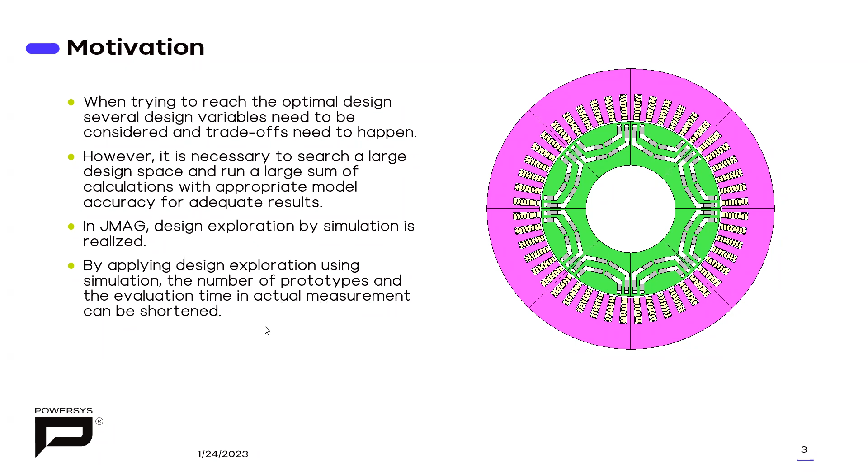So about the optimization issue, briefly, of course, now the large number of design parameters. So here you can see a sample example. This is just the rotor, but you've got also some for the stator. So more than 25 variables here. So you will have also wide ranges for all those parameters, but maybe those wide ranges will make the shape collapse like that with some overlapping regions. And we also still have many outputs like torque, loss, stress, and different operating points to be considered.

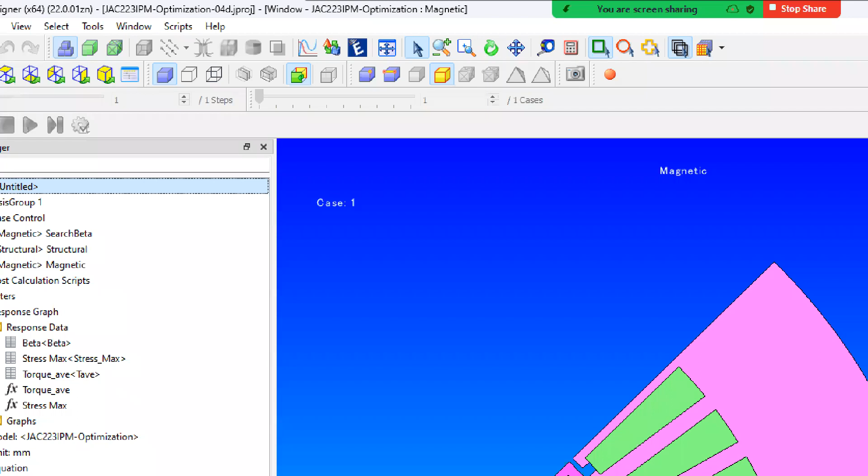So optimization is not new in JMAG. We had, for example, this very classical optimization. This is a model which could be downloaded in the JMAG application catalog. You've got the number here. Okay, all those features were already embedded. The thing is that in that case here, if you check in the optimization, you've got 1, 2, 3, 4, 5, 6 design variables. So the amount is relatively small, and you can see that the design of the rotor is not so complex.

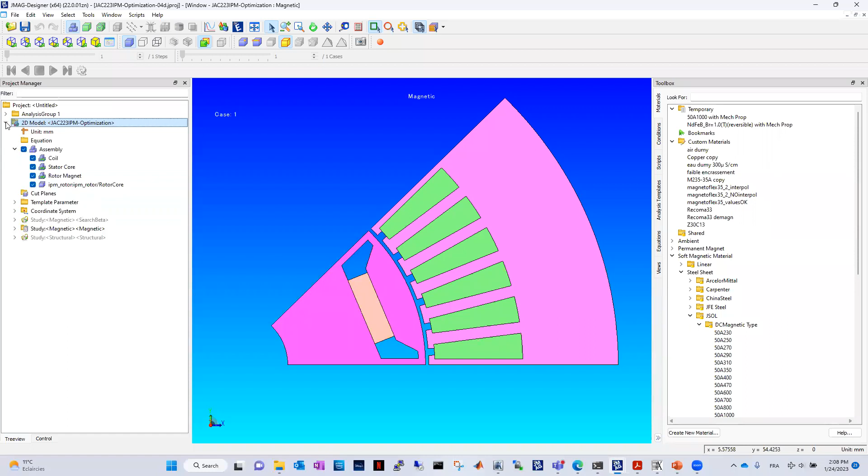You can also see that you can already make some group of studies. So in fact, here is your model in JMAG, and you've got different studies. This one is for searching beta. So you can see that this is a classical model in JMAG with this motor inductance condition, which is in fact the condition for searching the beta. Here you see beta max and beta min for one single current amplitude.

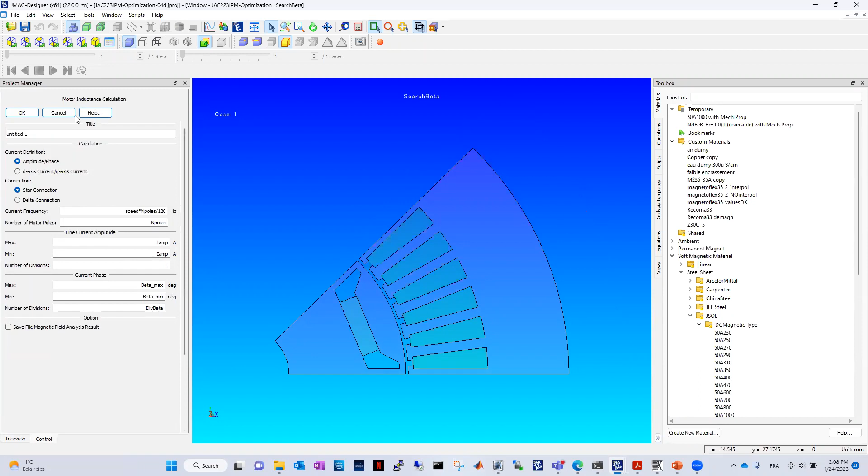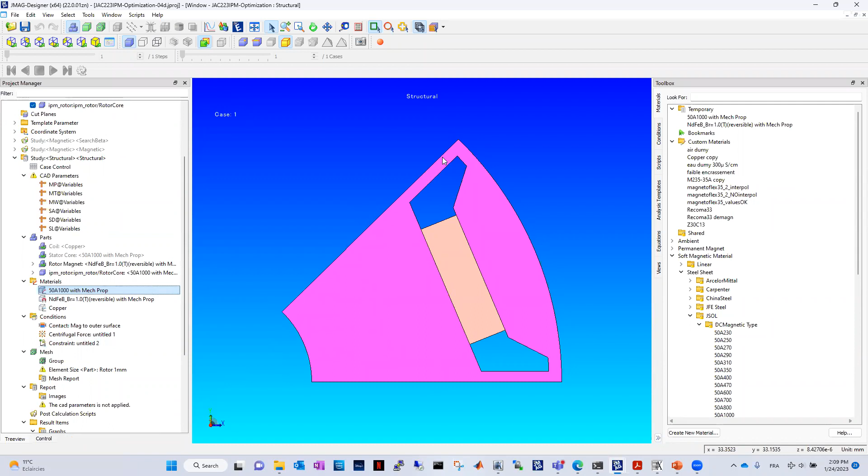So now I'm going to search for the best beta for my torque, for example, in this study. Then in the next study, I will maybe calculate my corresponding torque. And here you see I've got this response graph data, torque average is outputted. And also I've got the last study, which is structural. So it's now checking the stress, maybe in the bridges here. So you can see that all those things were already possible in JMAG.

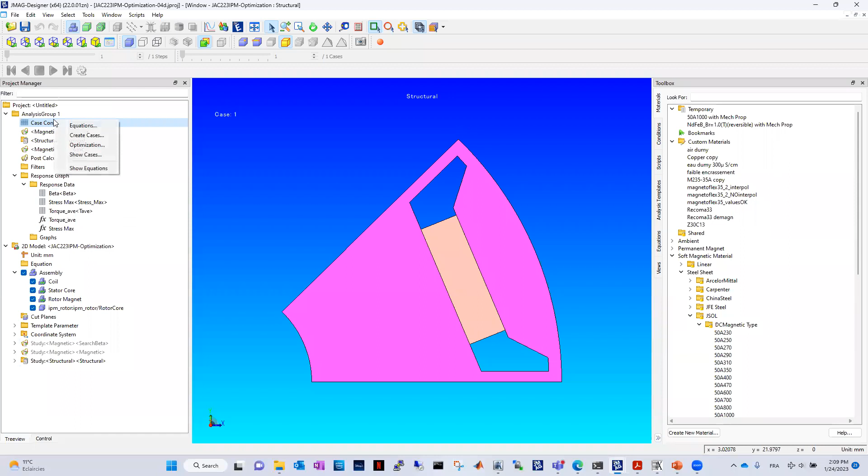Different studies that could be grouped in this analysis group. So you see that my studies are listed here, and all the response data coming from the different studies are displayed here. And I can now make the optimization and the objective function based on the response graph data coming from the group. So it means coming from different studies. So different physics, different numbers of parameters, everything was already possible.

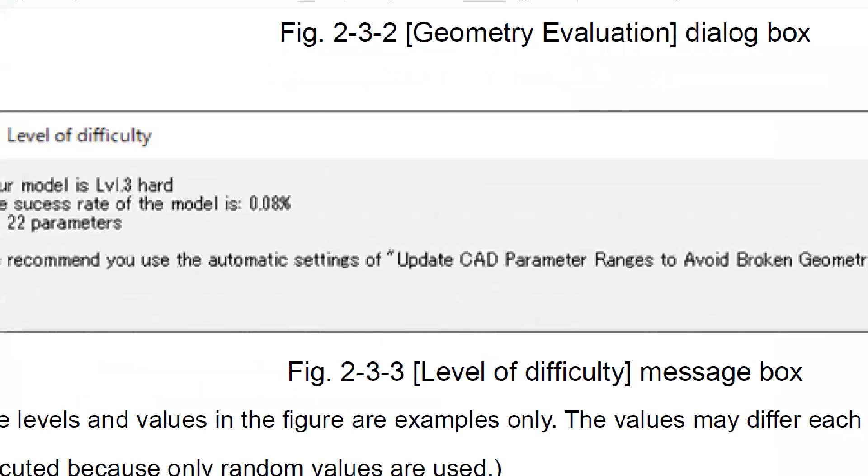The thing is that now with this huge amount of design parameters, the shape will collapse. And if you've got more than 20 parameters, you will have a very small success ratio of variable design sets of parameters that give a valid geometry. So in another tutorial, I'm going to show you that later, but there is a tool in JMAG that allows you to check how much success rate you have. And for this example, you see that the success rate is, okay, maybe its definition is not so good, but like this, 0.08%. So definitively, you are going to lose some time, and the effectiveness of your optimization will be very poor, because you will have very few successful shapes to be run in the optimization process.

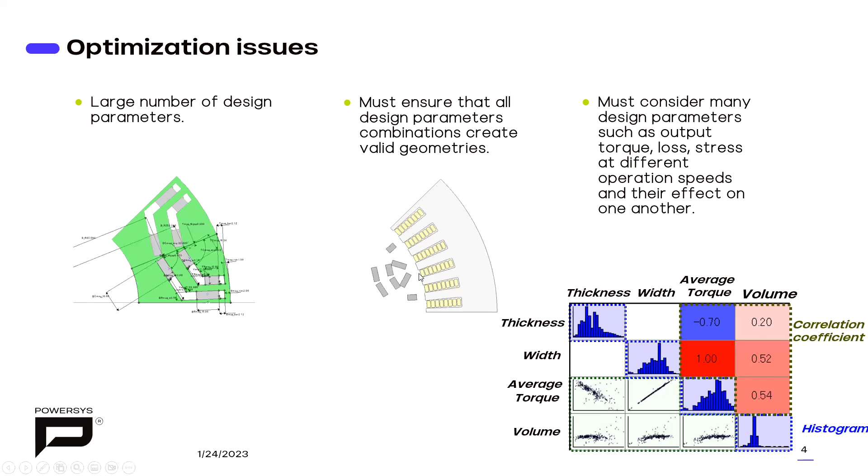So we are going to introduce some genetic algorithm, which is also a multi-objective optimization engine. Okay, but this time, this genetic algorithm will be used not only in the main optimization process, but in the creation of the shape, trying to get the minimum and maximum of each design parameter to get a valid shape, a valid geometry, with no region overlapping or something like that. No geometry collapsing.

So here you've got the process of the genetic algorithm. Briefly, it's generating some candidates and just keeping the ones that are valid, and from the remaining ones, adding new generations after generations.

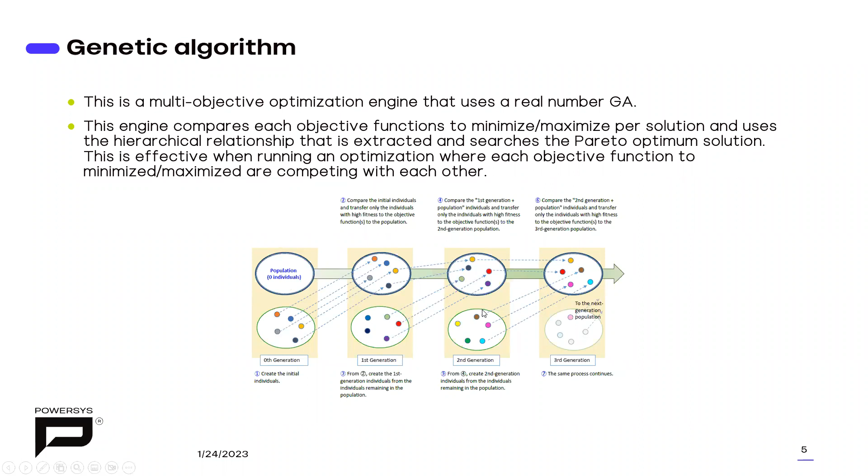So now we are going to use this GA for the range finder function in JMAG, so that you don't even need to put some minimum and maximum values. JMAG will do that for you.

In addition to that, JMAG will also create a predictive model, so that with a specific amount of geometry already tested, JMAG will be able to guess in advance if those new sets of parameters will give a valid geometry or not.

The rangefinder takes care of the min and the max, but when you've got many parameters, maybe in the middle of those ranges there are possibly some values that will give a non-correct, destroyed shape. So this predictive model will take care of that inside the range.

Now JMAG will be able to guess and to know if that will be a valid geometry or not. Of course, this predictive model is based on already existing experience data.

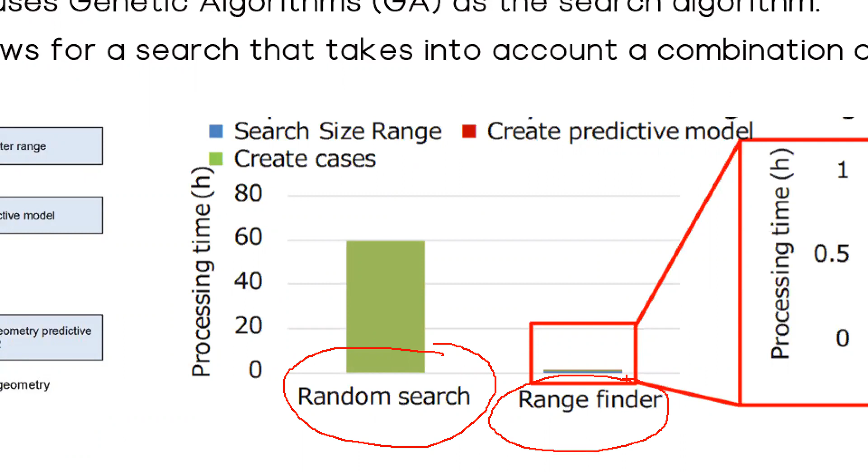So with all those tools, the combination of rangefinder and predictive model, you can see here the comparison between the random search, which is the classical one, and the rangefinder plus predictive model. You can see that the entire process time for the optimization is much lower.

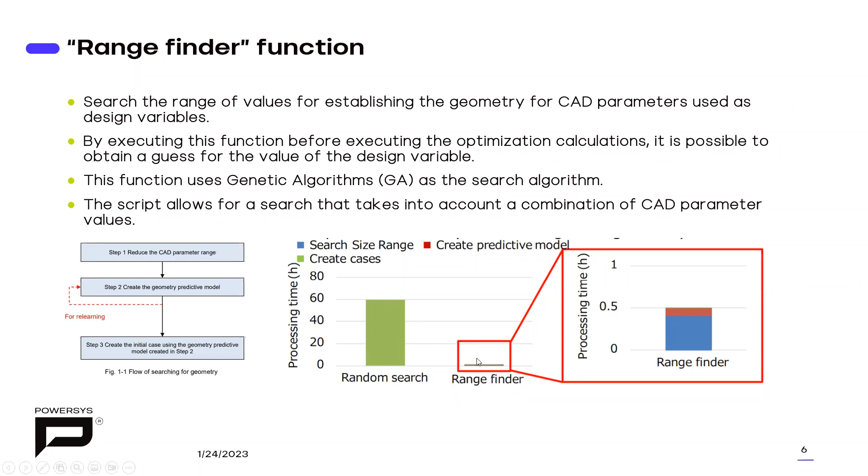So let me come back to this model I showed you briefly in the slide. This predictive model and rangefinder is not completely new in V22. It was already existing in JMAG in V21.2, but you had to use some pre-installed script.

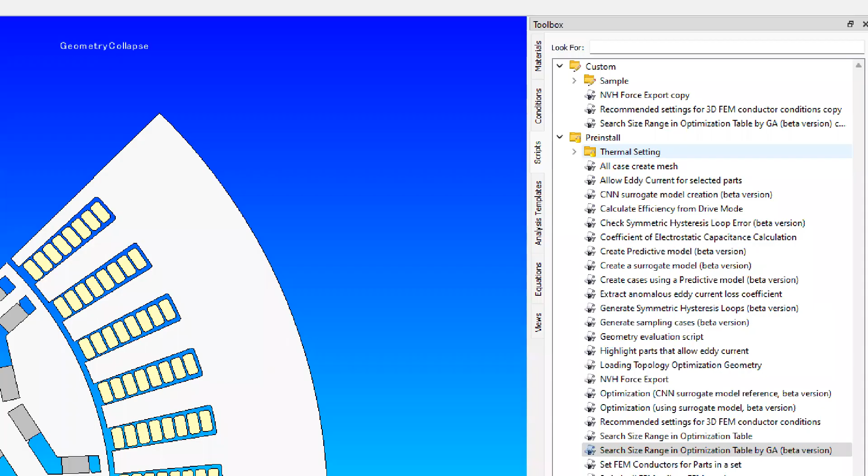So you had to use this rangefinder via the pre-installed script, three scripts that create cases and create predictive models. So you had to use those three scripts.

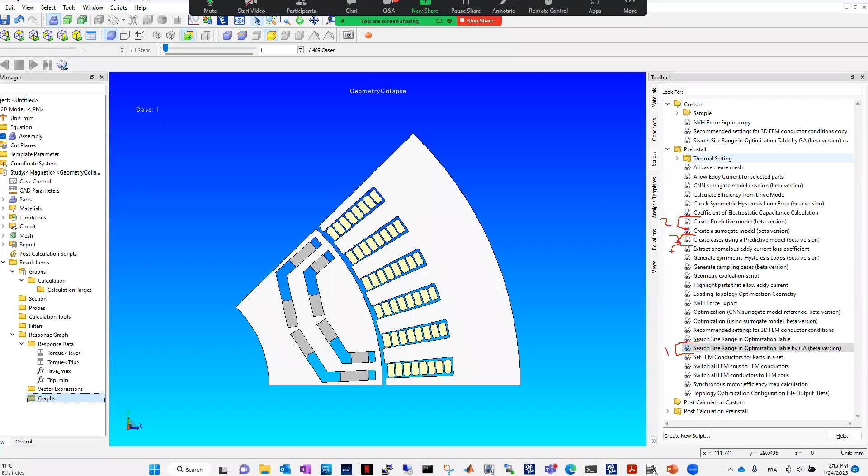Now the good news is that this is embedded in the JMAG graphical user interface. So if you go to your optimization window, and if you go to option, it's already checked, you can now have access to this rangefinder.

Anyway, this is the parameter you have to check here. This one will also use those new tools, and you can keep those set parameters automatically. In case you would like to change it, you can. That's the amount of data you would like to use for the learning model, the predictive model.

And also you can use this expand search range here. If you check that box, JMAG will also be able to extend this range and really go deeper in the optimization, making your optimization more effective by checking this new rangefinder.

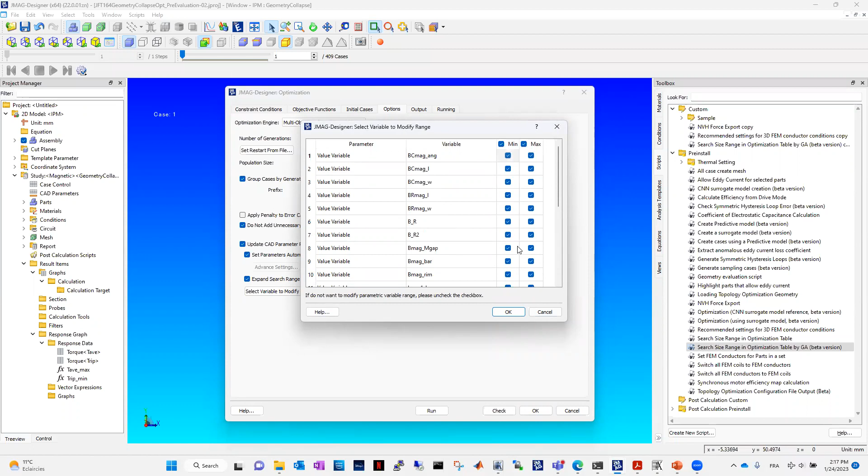Of course, this new feature is also coming with the management system of JMAG. This is the user job management of JMAG, so you can use this one also. It means JMAG will run all the jobs smartly to really save some calculation time.

Let's go back to the slide. The advantage of the rangefinder is to ensure the creation of non-overlapping regions, to avoid error in the optimization, and to be able to search in a wider range, because now JMAG will detect this range automatically.

And then, of course, you reach optimal design faster, but not only faster—your efficiency will be much better with this rangefinder, because the range will be very adequate, and the Pareto front will be very optimized using this tool.

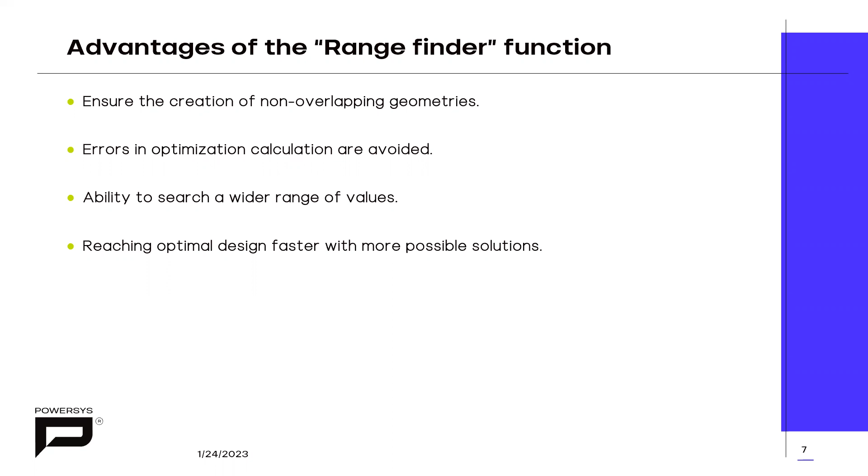So of course it will be faster, I mean optimal design will be faster, but the optimization calculation process may not be so much faster, because the goal here is to get a better Pareto front, not to go much quicker.

Here are the examples I presented you. Design parameter 25—we had 25 parameters here. Optimization, so you can see all the parameters. Okay, 22, maybe that's not exactly the same example.

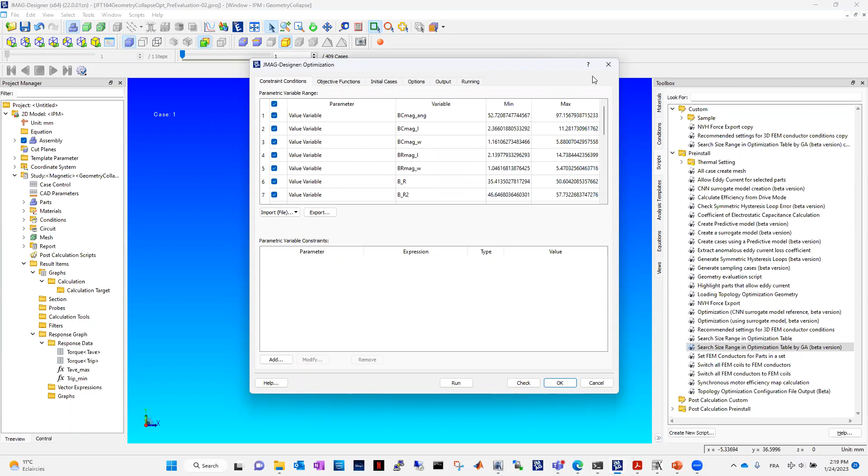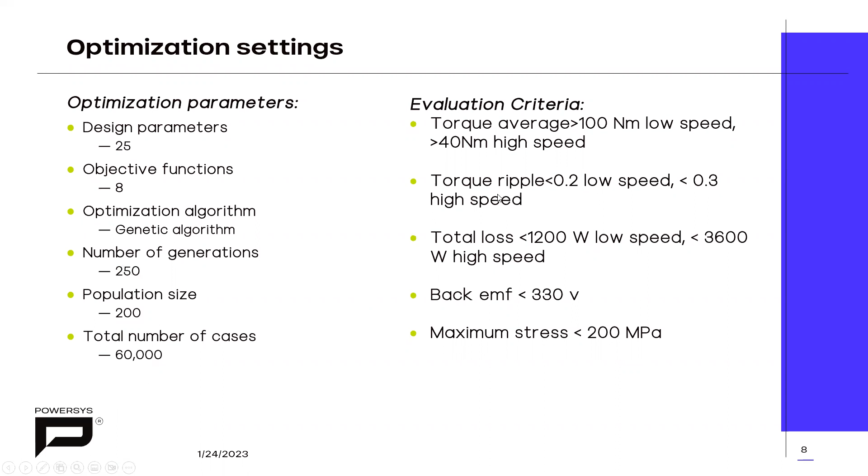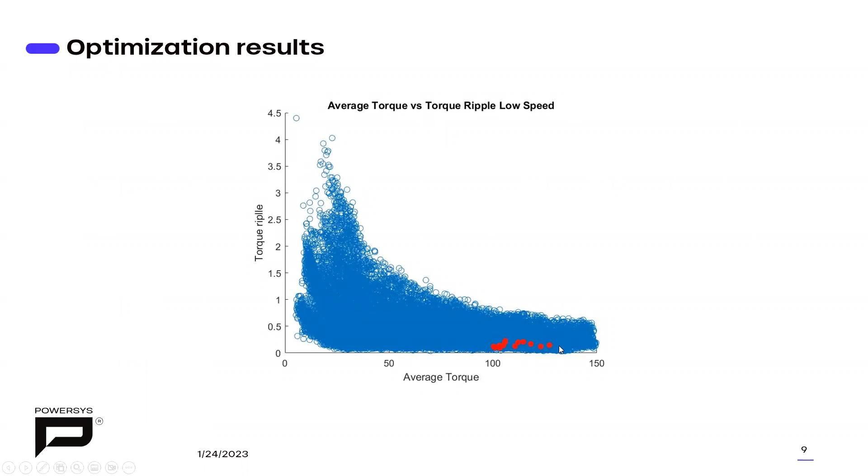Objective function 8, number of generations, population, total number of cases to be evaluated, and then you can see the evaluation criteria also here. Here is a small picture, an overview of the results. So you can see here torque ripple versus torque average, and you can see that one of the feasible designs is here, for example. And you can also see an overview here of the different results and different shapes with the values.

So you can review the values of the input, and you can also review the min and max, the range that JMAG has created for you. This is something I've already done, so I'll just show the procedure. If you go to optimization, here you can import the file that JMAG has created for the min and max, and here you can see it has already been updated.

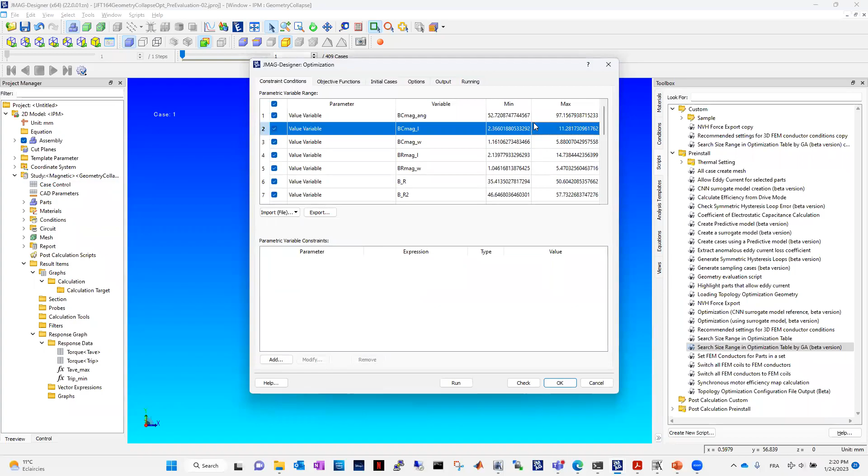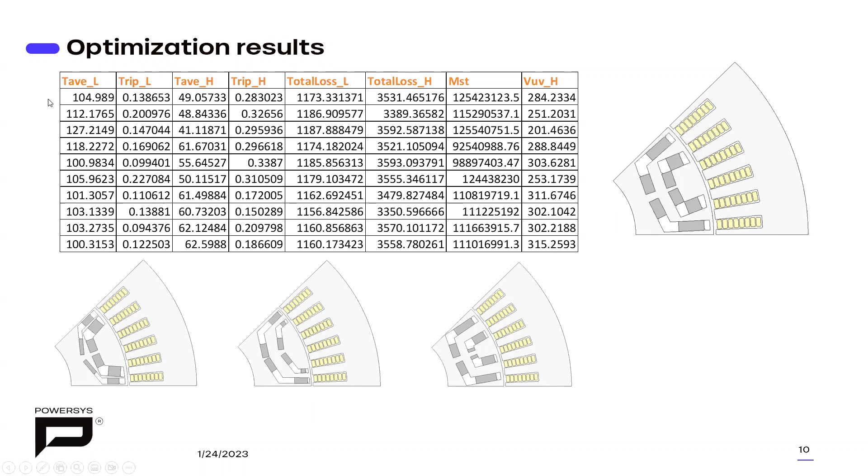You see there are many digits, so you can also check what min and max values have been used for the optimization. So what is the final range used for the optimization, the results of the range finder in fact, not only the results for the optimized design, but the value of the range obtained by the range finder.

So in summary, yes, we have achieved some exploration of the design space with the range finder. We ensure that we've got some valid geometry. We also use the predictive model to get the optimal solution faster compared to the random search. And this will be very useful to improve the effectiveness of your optimization.

Of course, calculation time should be better, but the goal here is to really go further in your optimization, to get a much more effective optimization and get a better design.

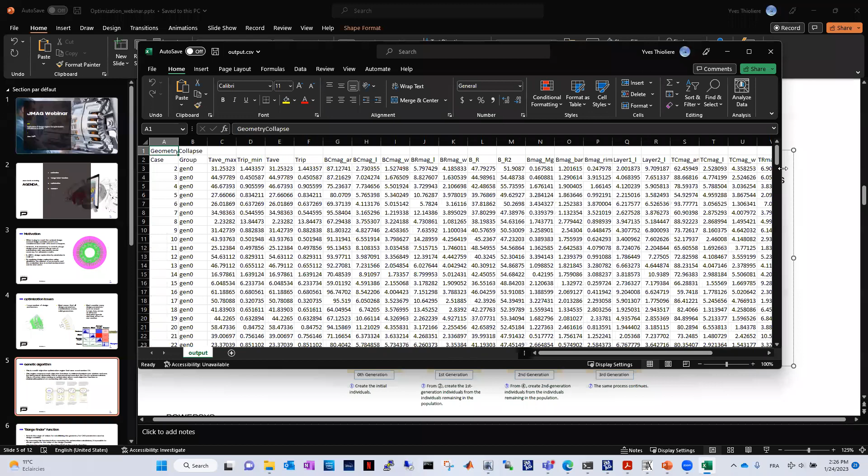But yes, the answer is yes, and that's the predictive model. So predictive model or learning data. JMAG will take some values for the variables, and the CAD will just reply that yes, it's valid, or no, it's not valid. There are several criteria for that. JMAG is checking if there is any region overlapping, how many lines and points are there. If there are less or more, it means that maybe there is some collapsing or something like that.

So yes, that's the predictive model or learning model. There are different names. You need to put enough amount of data, amount of trials, in this learning model, and based on some mathematical formula, JMAG will be able to guess with any other different set of values if this will be valid or not valid.

Is this feature available in JMAG v20.1? No, I don't think it's available in v20.1. As I said, you need to have at least v21.2, and you need to use the script. If you would like to have the embedded function in the graphical interface, as I showed previously, you need to go to v22.

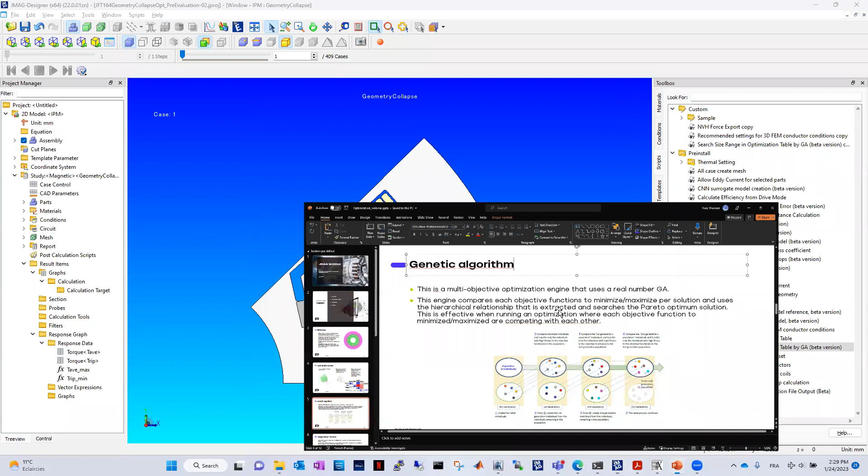In the objective function, in the main optimization process, yes, you can put some weight and you can prioritize if you would like the torque average to be more important than torque ripple, for example. So yes, you can do that. But the one I'm presenting now, which is used in the rangefinder, is not dealing with the main objective of the optimization. It's just checking if it's valid or not valid from the shape point of view.

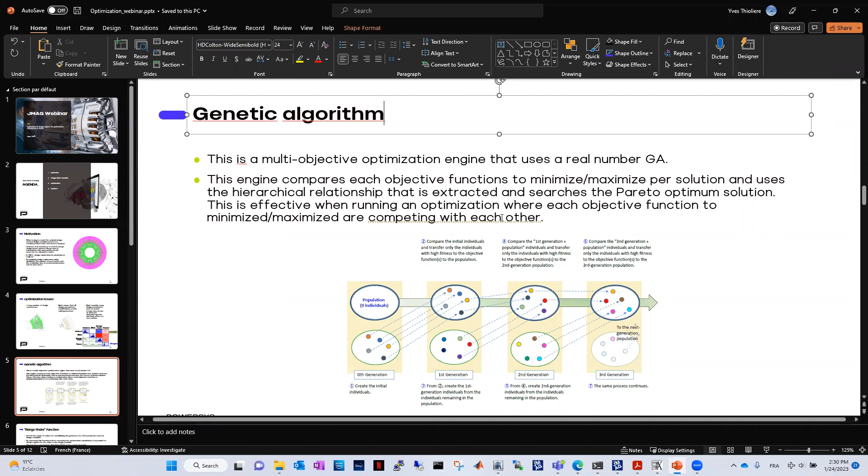How is design parameter sensitivity to the objective function incorporated? I guess that's more or less the same question. If I understood well, it looks like the same question. So here also, in the optimization, in the objective function, you can prioritize and put some weight so that some objectives are more important than others.

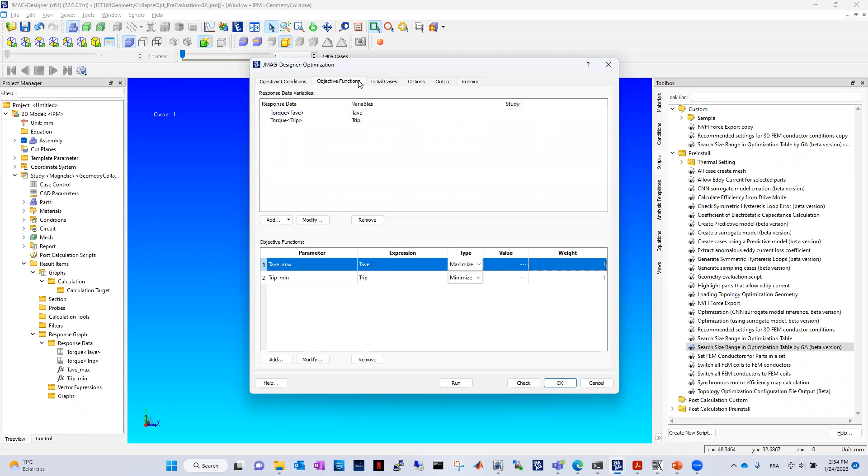I think we can continue this discussion. You can contact me and maybe I can try to find some more information. As far as I understood, your question is more related to the main optimization process of JMAG, not so much the rangefinder and the predictive model I have presented. So maybe we can continue the discussion outside the webinar.